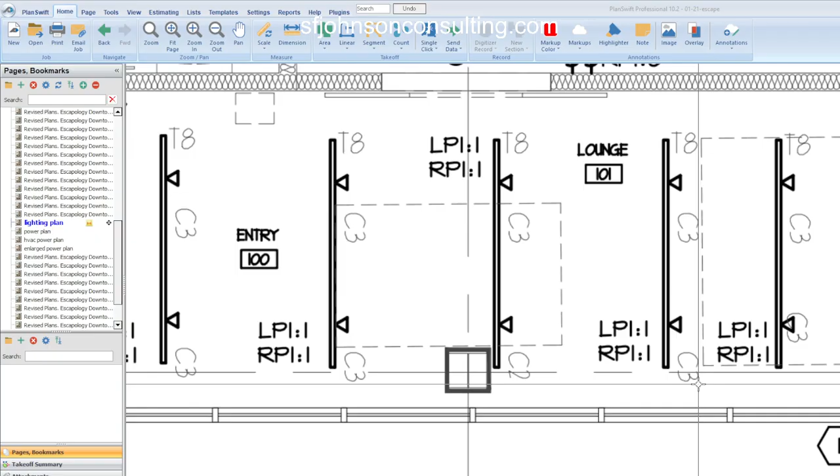But when it comes to electrical, you have a lot of challenges. Okay, the conduit, the wire, how do you determine all these different things? If you're an electrician, you should know what this means, okay? But you may not be an electrician that has time to do this, okay? And so let me show you why you should either hire me to do your estimates, pretty simple, or let me teach you, which is even better, okay?

And so, as you know, with your electrical plan, you have your lighting plan, which we're looking at right now, okay? So we have to be able to determine, we can count, and if you have a good counting tool, as you've seen me count a million times, the counting is easy. The part that's not so easy and that's challenging,

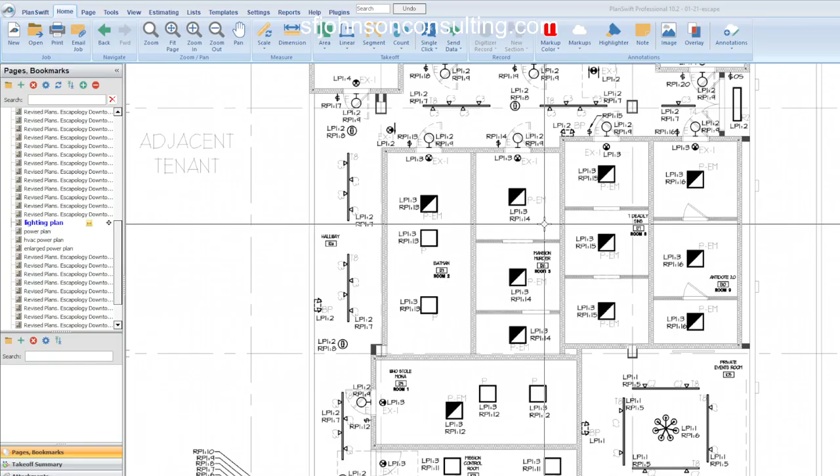We can count all day, and again, you'll see my study video if you choose to see how I did the lights. Okay, this one, the emergency light's different than that one, and how we do it.

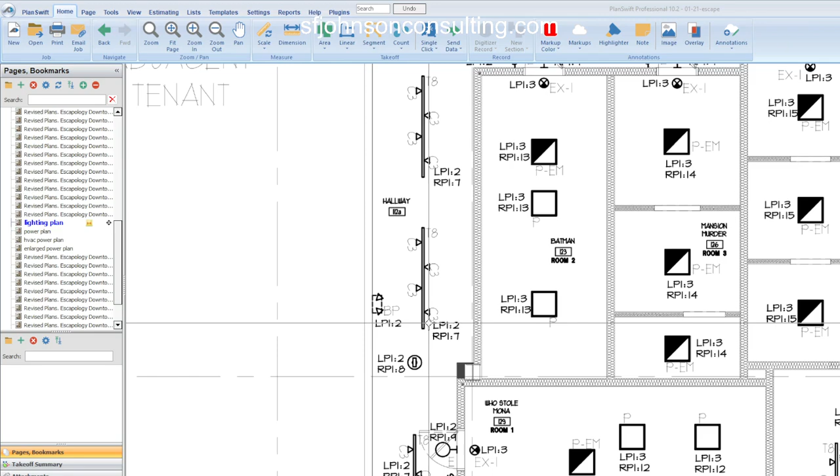If we have the track lighting, what's the proper way to account for the track lighting in terms of your takeoff? Well, it really depends on if it's standard. If you've got 10,000 different lengths of track lighting, then you probably, which I don't think we do. I think all of these are pretty much the same length, T8, T12, T whatever. Yeah, they're probably all 8 foot, or some are maybe a little shorter. No, it looks like they're all T8, which makes it easy because you want to do the takeoff based on how you have to buy the material.

But when it comes to placing the labor, setting the T8 is separated from the labor to set our C2s and C3s into the track. So if you want to make sure, you've got to separate all that stuff. And that's just the lighting plan. This one's a little complicated.

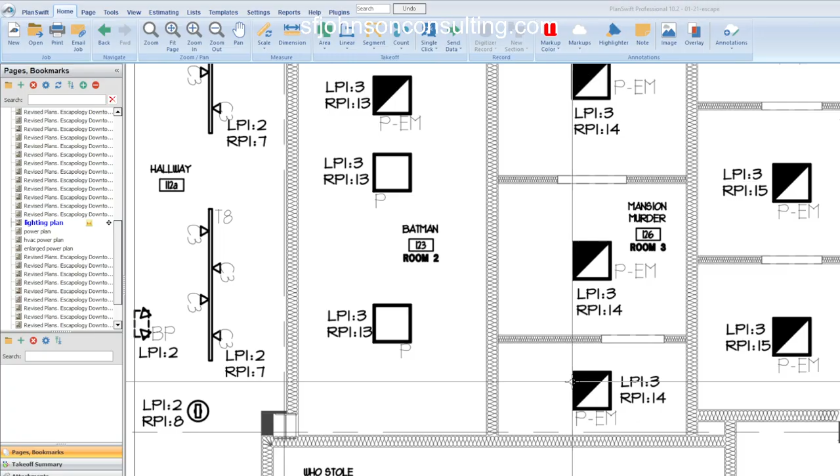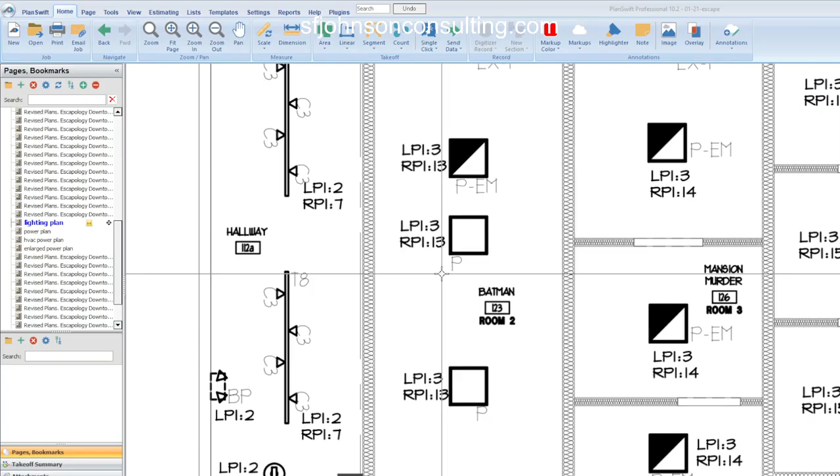Now, in terms of our conduit and wire, we have to understand how lighting circuitry works. Basically they're telling us how the lights are connected based on the subscripts that they have on it. When you take my class, you'll understand how I run the stuff, and it's close enough. Add 10% like most things, and you're close enough. How do you run it, horizontally or vertically? Well, it really depends on a few things.

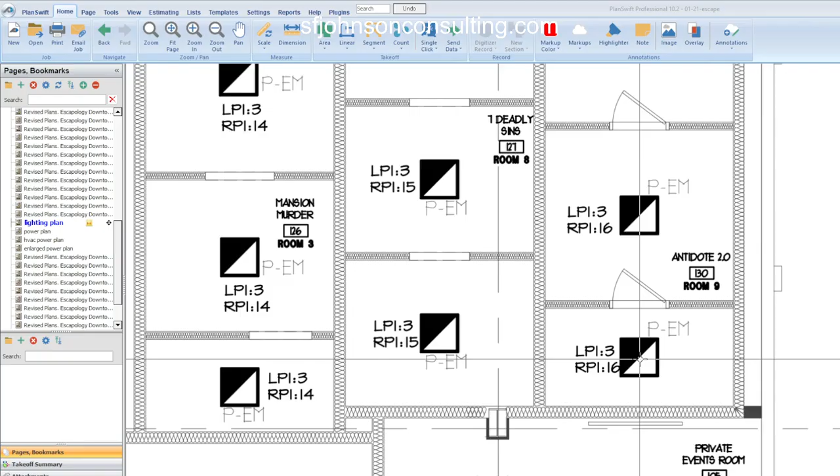How it's noted here, and in terms of lighting, a lot of the same lights, even as you can see in different rooms, are controlled by the same lighting control. And that's the most difficult part when we talk about electrical estimating. What you want to be able to do is give it a sufficient amount that if you were the estimator, and hopefully you have a good relationship with your electrician, you can say, hey, look, this is how I ran it.

And that's why I always give my clients videos. Hey, this is how I ran the conduit, and as far as the wire configuration, it's in the specs, or it's in the plans, or it's standard MC cable for certain parts and number 12s for the home runs. That's typically the case. So that's not hard. But that's what you have to think about, and that's a lot to think about.

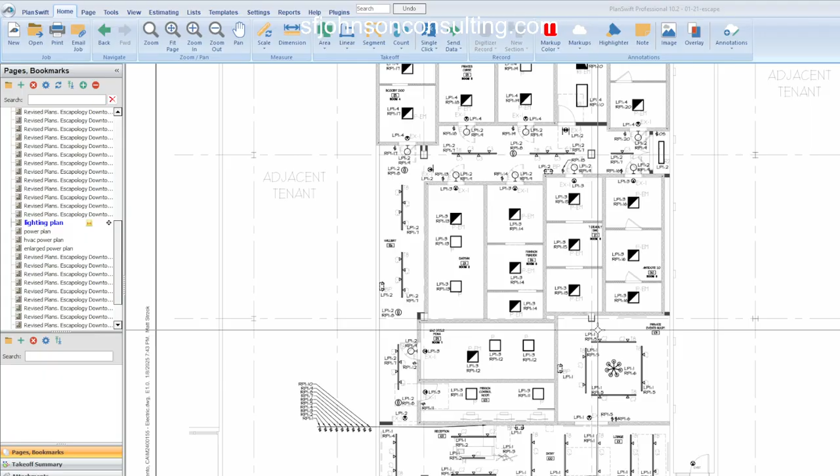Framing: it takes you 5 minutes to do how many linear feet of wall A, B, and C. 2 seconds, once you get real good. But this, no. Because every set of plans is going to be different. The lighting controls are going to be different. What does this mean? Okay, I see. I have to match it up too.

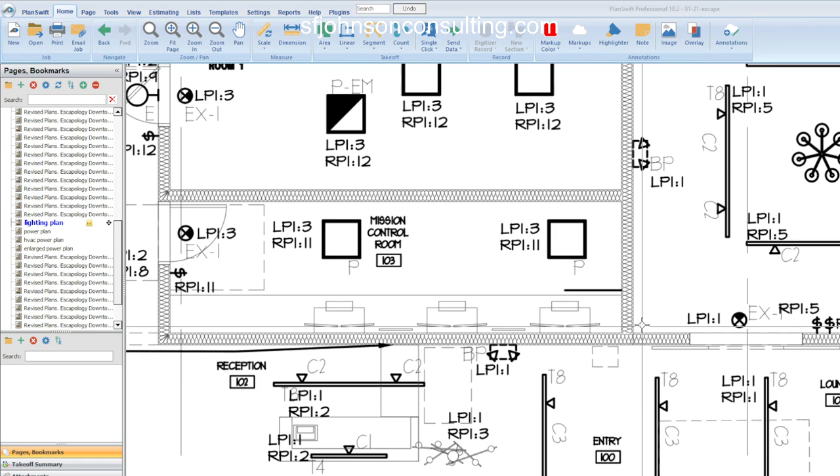But what we have to do is physically run that wire. How would we physically do it? What you want to do is just give the best representation, the cleanest runs. You don't want to go all in circles. You want the cleanest runs you could possibly have that are real life. If you're really good, you're going to say, how far up does this wall go? Do I have to penetrate the wall, if necessary, to get through here?

My son's an electrical tech, and he says sometimes we've got to put a hole in the drywall to see, because we think it's free and there's like a cross. So I said, bridging. He's like, yeah, something going horizontal, not just the vertical studs. And then you end up running into something you've got to cut through to get through the wall. That's why I like working with people that do it, because you get a practical understanding of what happens every day. And then you, as the very detailed estimator, can speak with your professional and say, hey, look, this is how I did it.

Now with video, you can show them, so you can really be competitive. There are people out there using the right tools, doing the stuff as clean as they can, and then going in there and winning. Because understand, when you win a project, it's not set in stone. You need to make sure you understand. If you take my construction law class, contracts and understanding them is very important.

There's so much that if you don't have some kind of mentorship, or you don't do it for a couple of good years for somebody that does it well, and then go out on your own, you're really going to be taken advantage of on so many levels, or you're going to be so lost on how to do certain things.

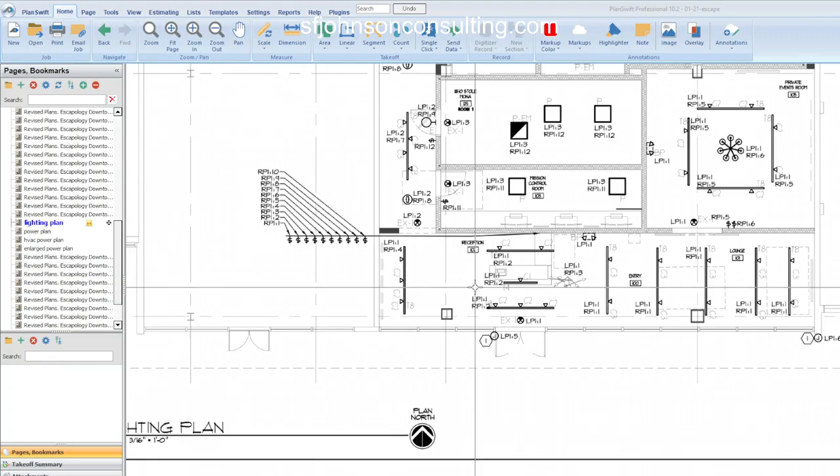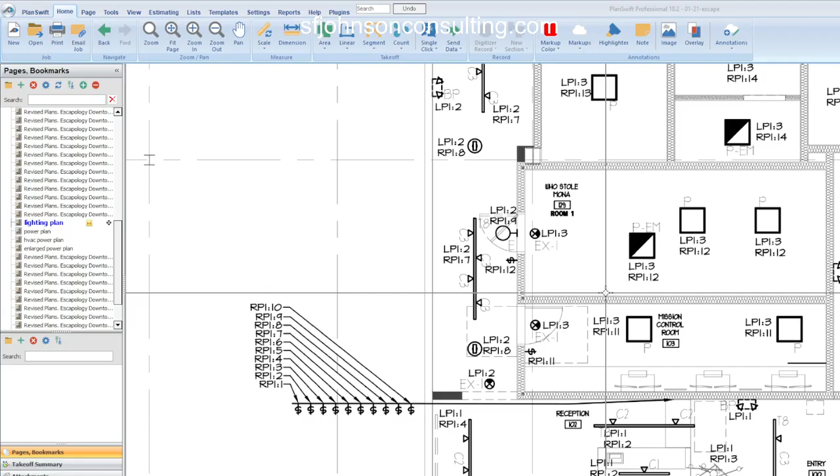Okay, and so I don't mind sharing my logic and my understanding of everything. And a lot of people out there in construction are too competitive to think too far ahead. That's why I don't have the subscribers that I should. If I was some other person, I'd have 10 million subscribers. But for some reason in this country, we think if I help you, I'm not helping myself. And that's the most ignorant concept we've been able to hold on to.

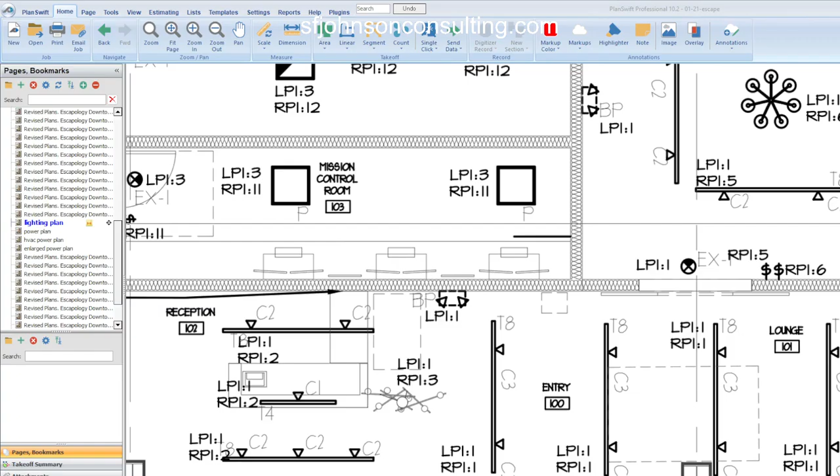We'll keep moving. Anyway, so what you want to do is make sure you do a lot of projects, and the hardest part of it is being able to run the conduit. And how do you physically get that going? It's easy after a time, once you talk to a good professional, a good estimator or a good electrician you work with, you'll get it. All right. So that's just the lighting plan.

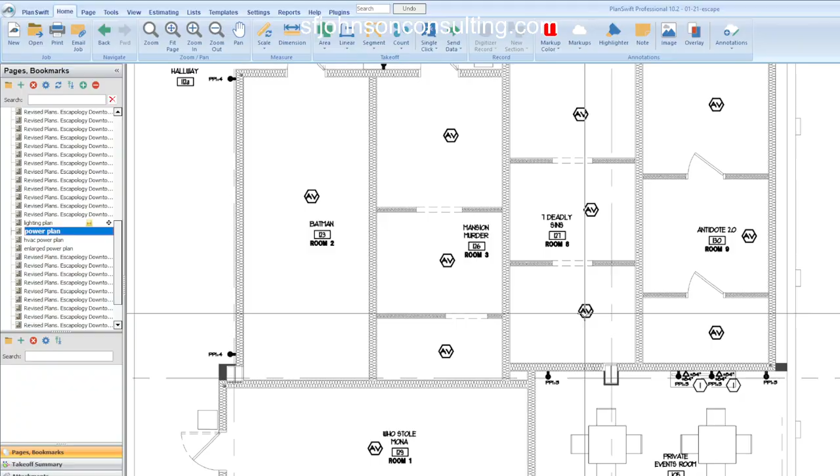Now, the power plan. Depending on how detailed it is, you've got to do a lot of thinking on your own. Okay, and so you have to read the specifications. I'm sure there's some kind of conduit that I have to attach. I'm sure there's some kind of junction box, AV, right, that the electrician's got. But that's why you read the specifications. Or there may be notes. Yeah, there we go.

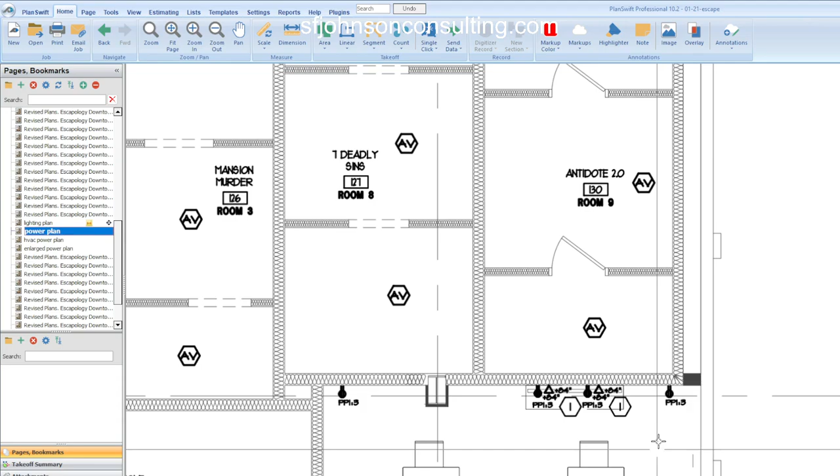4-inch conduit run for low voltage wiring. Audio must be... Okay. Where's number 2? We know what they're talking about. 4-inch conduit. Well, I'll find it, and when I do the video, it'll be clear. But again, conduit and wire runs, that's where it's like, okay, well, what do I do? Because that's a major part of your material cost.

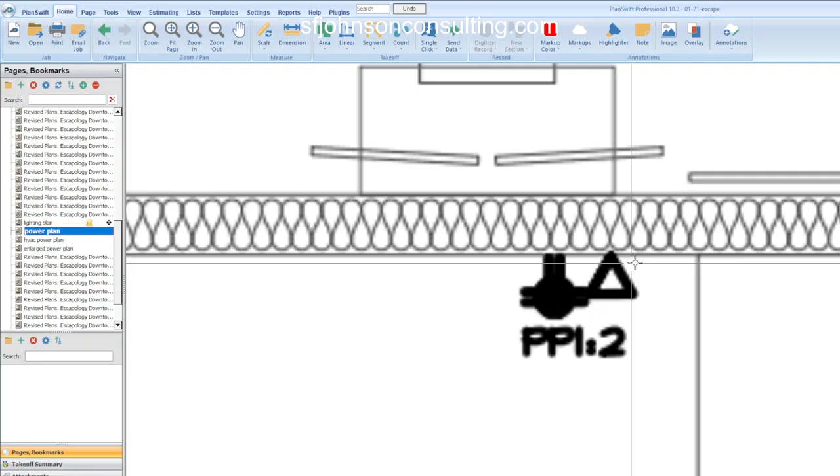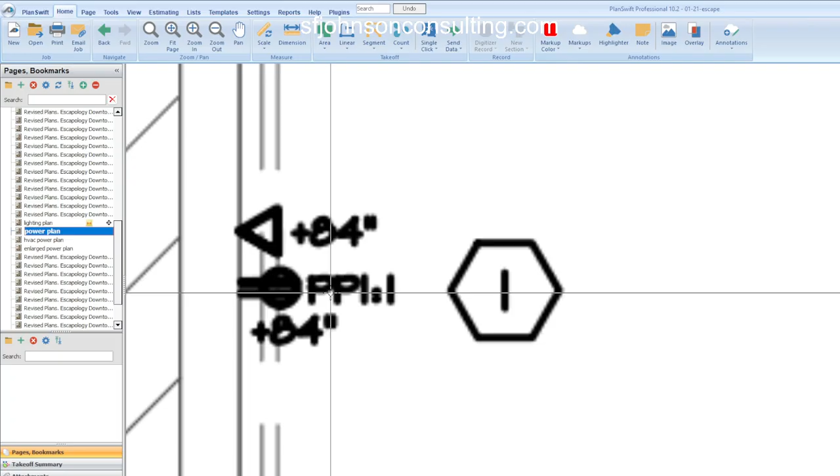Because if I'm the high voltage electrician, I'm not providing Cat 5, Cat 6, low voltage wire, anything like that, right? But I have to provide the junction box and the conduit to the ceiling in most cases. But as far as running the power for the general outlets, general purpose outlets, well, what is PP1? Well, that tells me it's going, hopefully, to a panel called PP1, position number 1, right?

And so just like the lighting, we know that depending on the subscripts and everything that's on there, those can be connected together, and then at some point, PP1, PP2, whatever, we'll show you in class how we run it to the panel. Okay, and what's the best way to run it? What's the cleanest way to run it? Because that's the way pretty much a good electrician is going to run it.

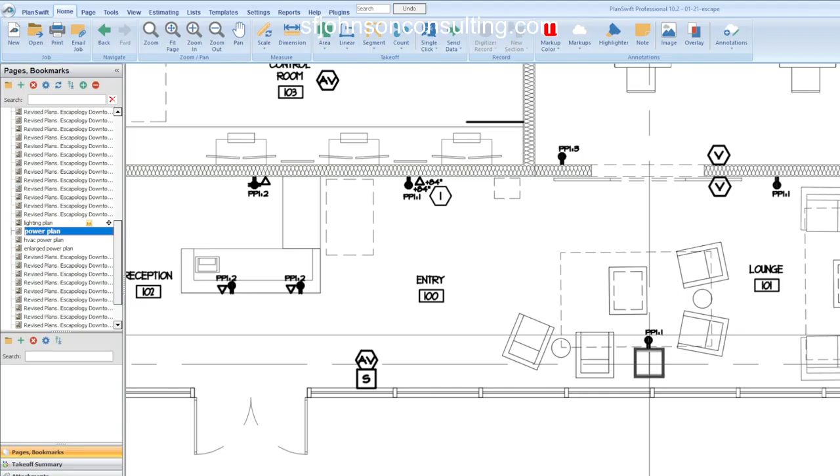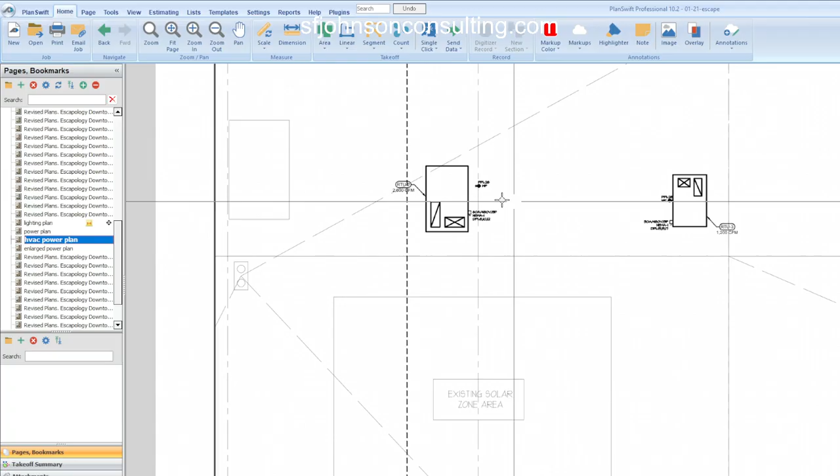And then you have your second step, which is what? Pricing it and determining man hours. Well, you need another tool for that. Just like you have the tool to count and measure lines and stuff, you need another tool for that. And let's never forget the HVAC power, okay, and the disconnects, if they're fused or non-fused, and the general purpose power that also connects to it. You've got to remember that.

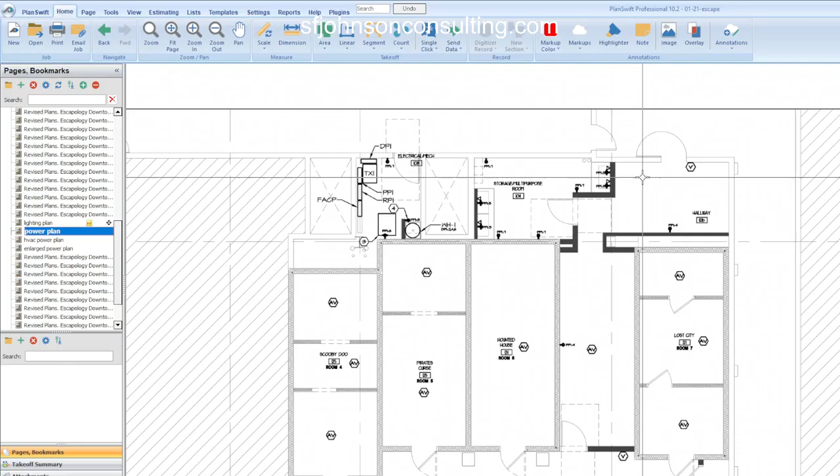Now, I'm out here on top of the roof. Where are the panels? You've got to make that a practice. You've got to know how to go back and forth. In most sets of plans, the only place you're going to find the position of your panels is on the power plan. Maybe they show you the panels on the lighting plan. No, they don't, right? Because that's just not what they do.

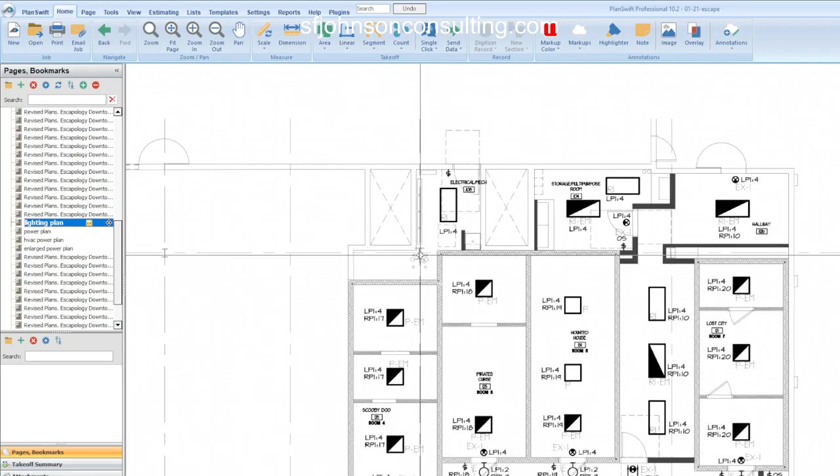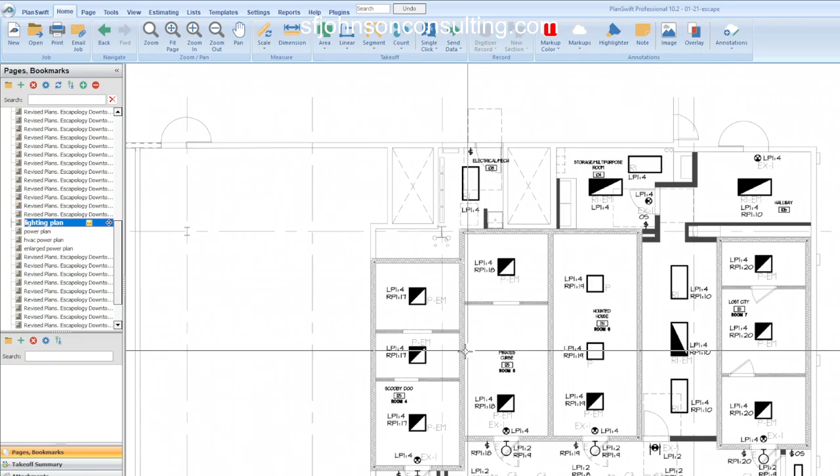But they show you on the power plan, so you have to know when you go back to the lighting plan, they give you a little outline of them. But which one's P1, P2, which one's LP1? You've got to go back to your power plan and note it in your brain. And then when you're running your home runs for your lighting plan, you know LP1 is right here. And so I run them all together, and then I run the home run to wherever I've determined, for all of the LP1s.

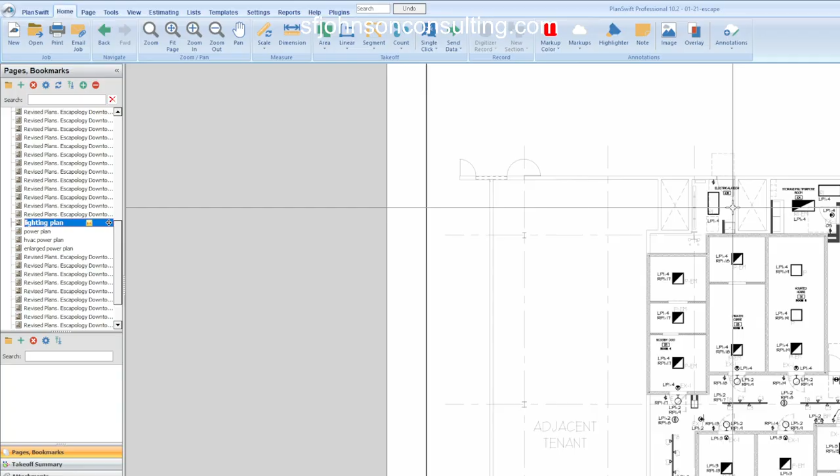RP118s, we ran them all to this location. We ended it here, and now we're going to run the home runs from here to there. That's how that works. And you can imagine at the end of it, you can't see lights or anything, because all you see is all of your runs, whereas this is much easier, not a lot of outlets, which is beautiful.

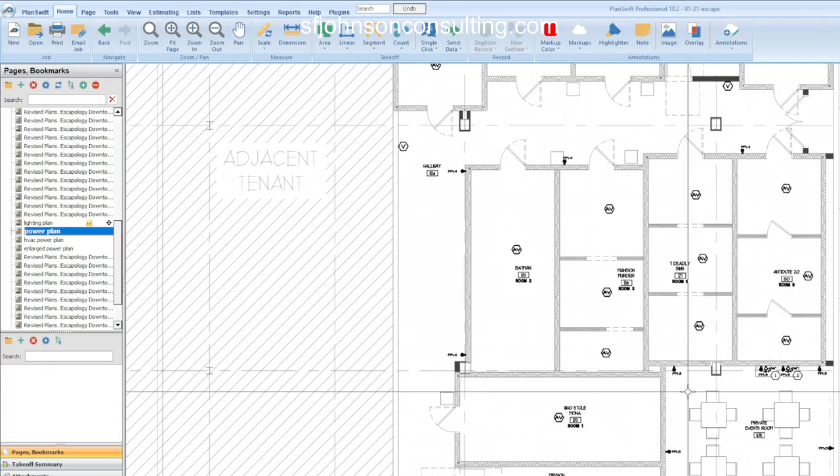And so we connect all of those in what we call series, right, all together. And then at some point when we figure where the end of the P4s are, we run it to the home run. Add 10%, don't worry about the vertical runs up and down the wall, even though it has good enlarged plans to show you exactly.

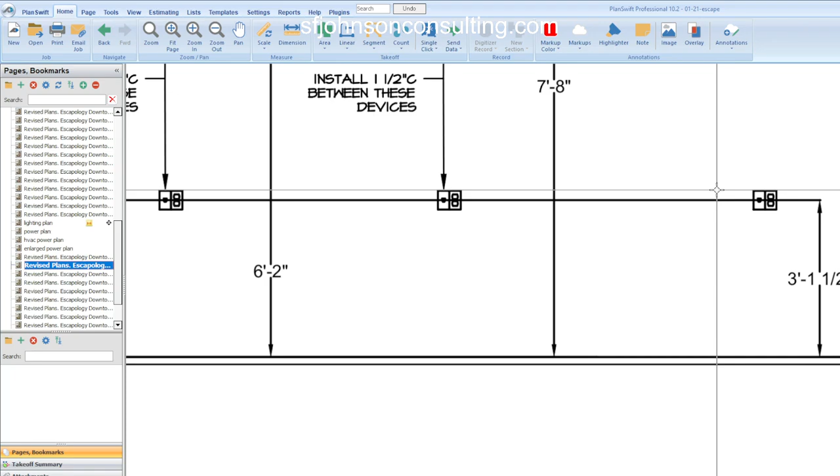So this might be good for me and my son. We're talking about California regulations. Well, it's probably standard that any device is standard 3.5 feet above finished floor, and so what they did is give us enlarged plans, but we don't really need that. This is for the actual electrician when he has to go and do the work. Now I can do my actual measurements and determine exactly where everything has to go.

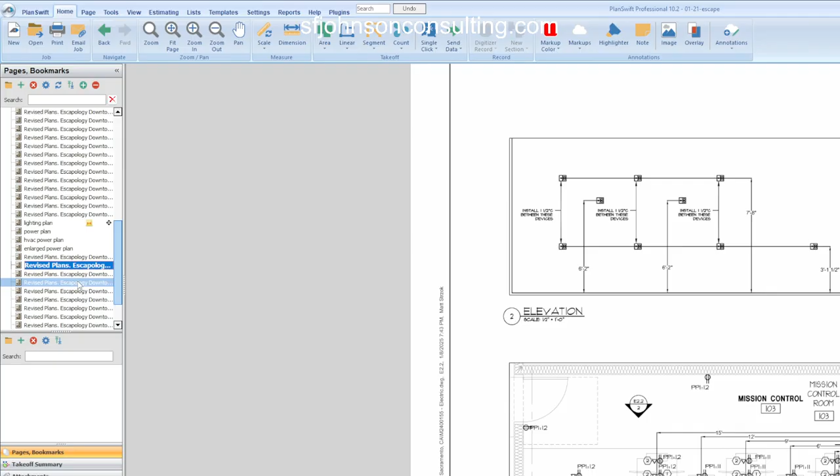And this is what it looks like on the plan. But in the elevation view, right, in the real life view, that's what it looks like. All right, and I didn't mark... okay, so HVAC plan, all the enlarged plans. Where did I? That's plumbing. Okay, well, you just have to go with me on this journey, because the last thing we always have to do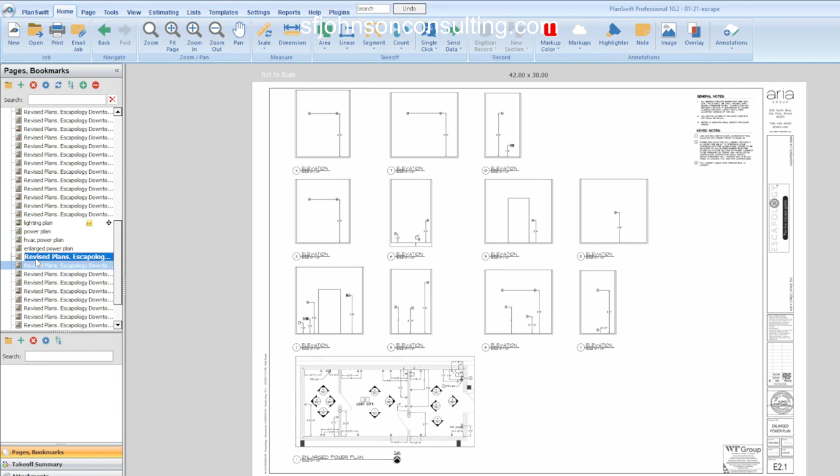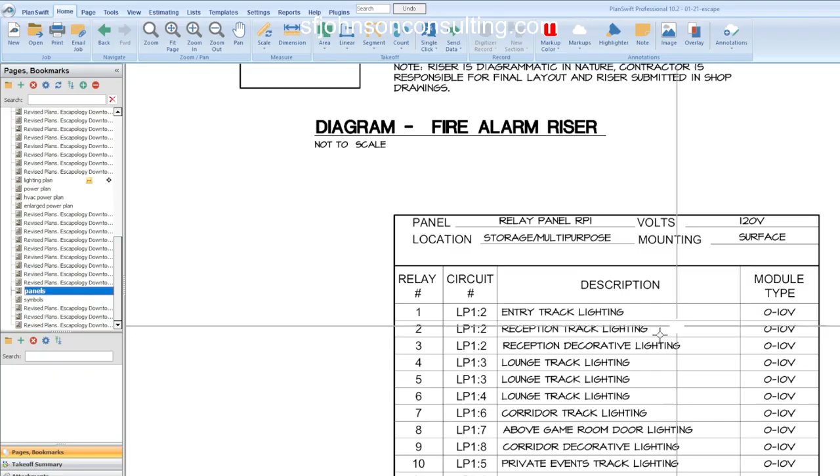is, let me make it easy for my mouse hand. We have to look for and find good elevations for, there we go. Oh, I did put it on there. And we have to find all of, okay. So this tells you your circuitry for the lighting control. That's nice and clean. It's a nice set of plans. All right, so we need our single line, right?

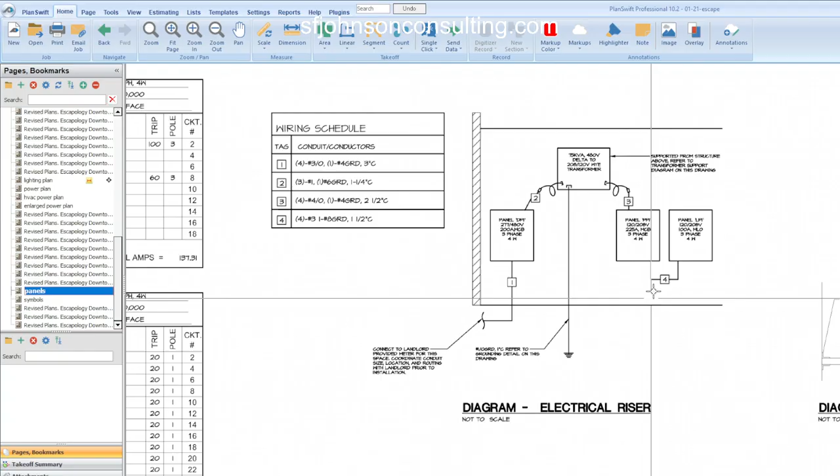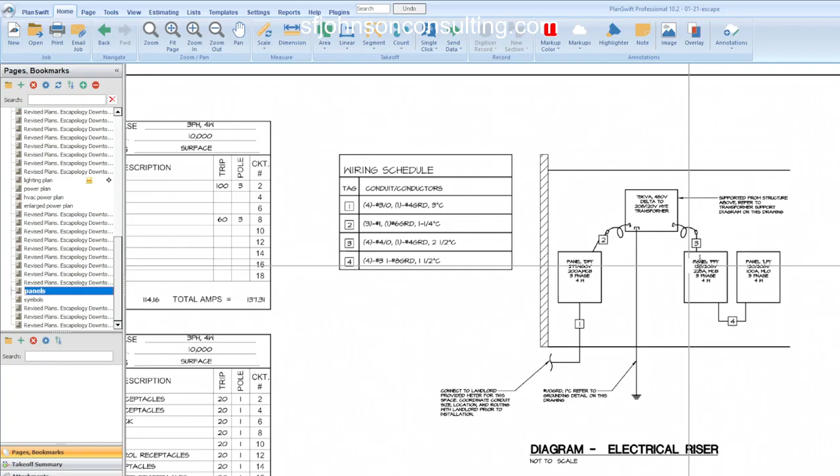So we can determine all of the power feeders. And when we looked on that power plan, these are very close to each other, so it shouldn't be a problem at all. And so the 2, 3, 4, and 1 should be telling us the wire configuration for each of those. And whether I'm asked to or not, I just use rigid steel for all of the power components. EMT to it, or PVC, depending on where it's at.

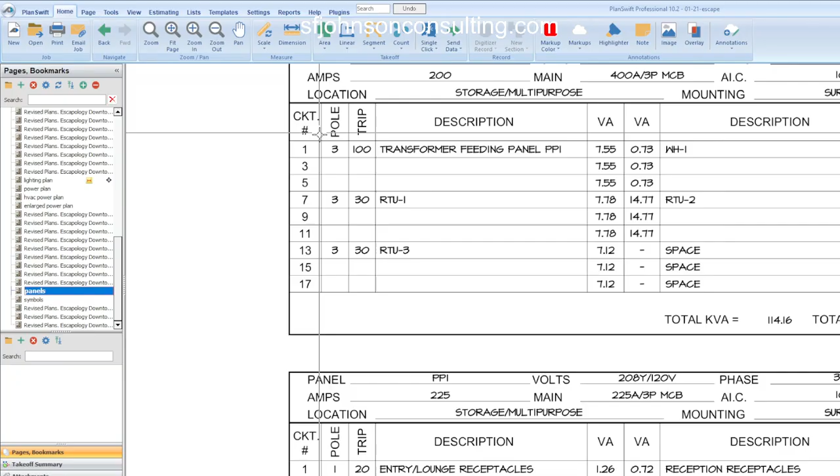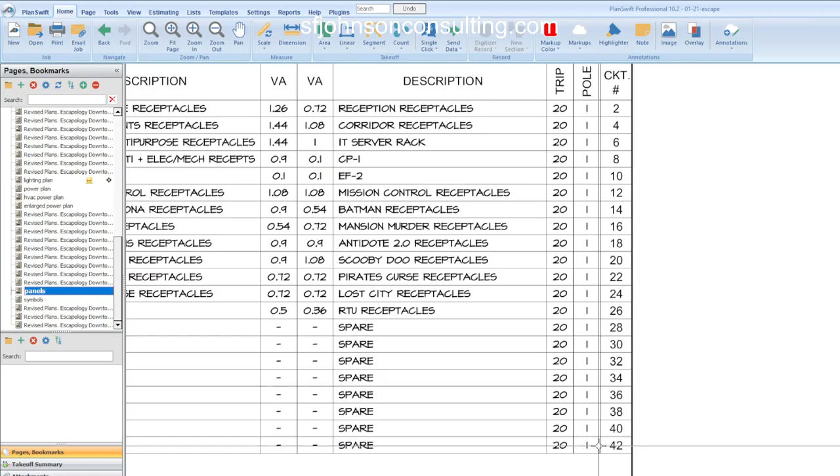But the last step is we got to count our breakers, right? The size and how many poles on both sides. Okay, and we have to be able to determine, based on the number of breakers, our cost book is going to tell us how many man hours we should apply. 42. Now, it doesn't take me that long. Because the better you get at a thing, it shouldn't take you that long, right? But we are saying that this is what the construction industry standard is giving you. And if it takes you less time, what do you do? You knock those man hours off and you become even more competitive.

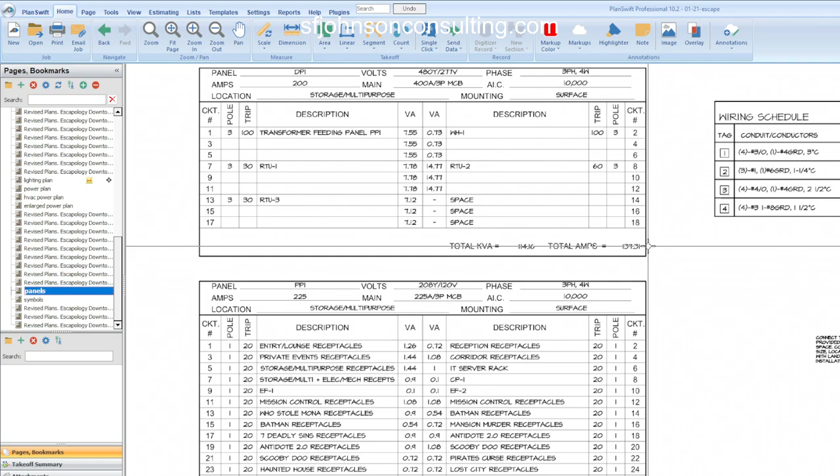Okay, and so typically a 42, that's about 15.1 man hours they give you to install a 42 breaker panel. Anything above or below that, I forget, because that's the typical 42 position. And so, yeah, we got to count all the breakers too. So that's like the last thing. But as you can see, the easiest part is just having a really good counting tool. But now you have to make sure you have a good and logical way of determining how many linear feet of your feeders, your MC cable, your number 12, number 8, whatever it is.

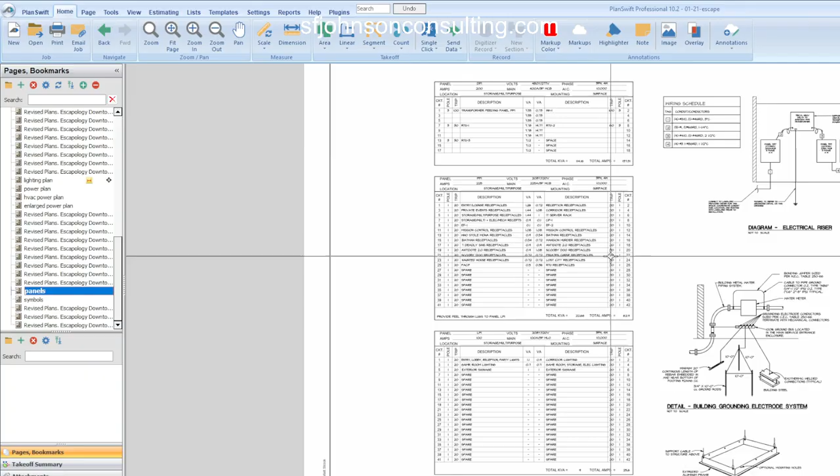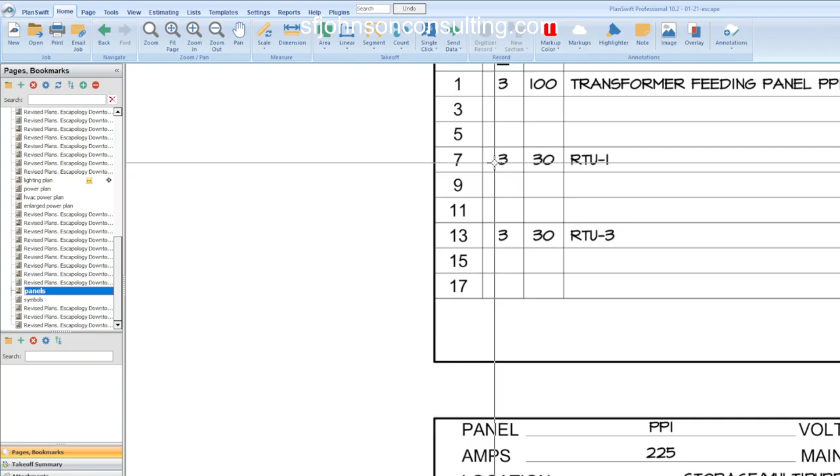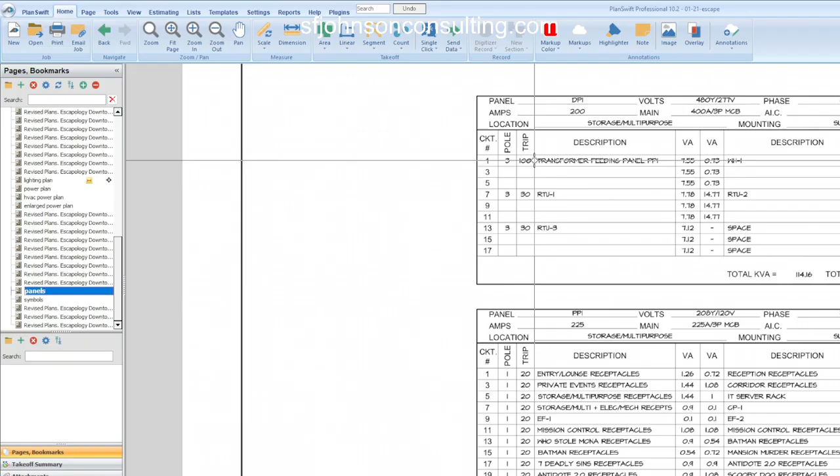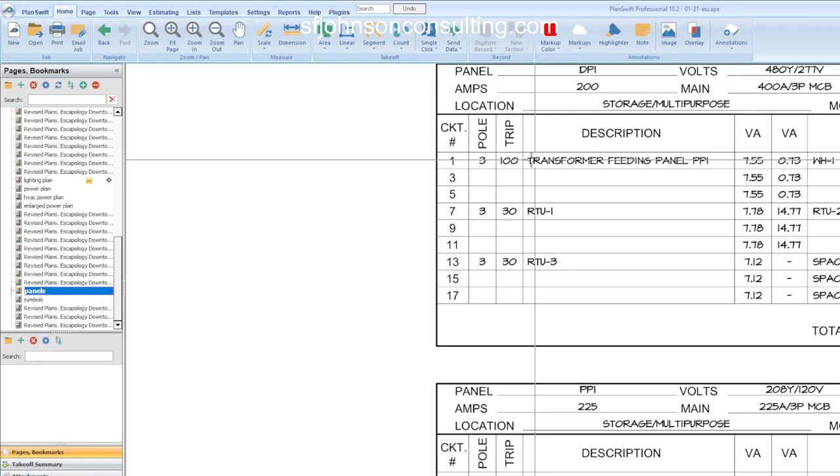And just rule of thumb, if it's a 20 amp one pole, the wire running to it is usually a number 12. But if you've got like rooftop unit 3, 3 pole 30, that's telling me that that's not just number 12s. And so you want to go a little deeper than what you're given in the plans. Let your electrician know, or go from past experience, because the electrical estimator isn't an electrician. Electricians can determine, depending on the power consumption of the piece of equipment and a whole bunch of other factors, what the wire configuration is. So if it's not outright given to you, then you should be able to get it.

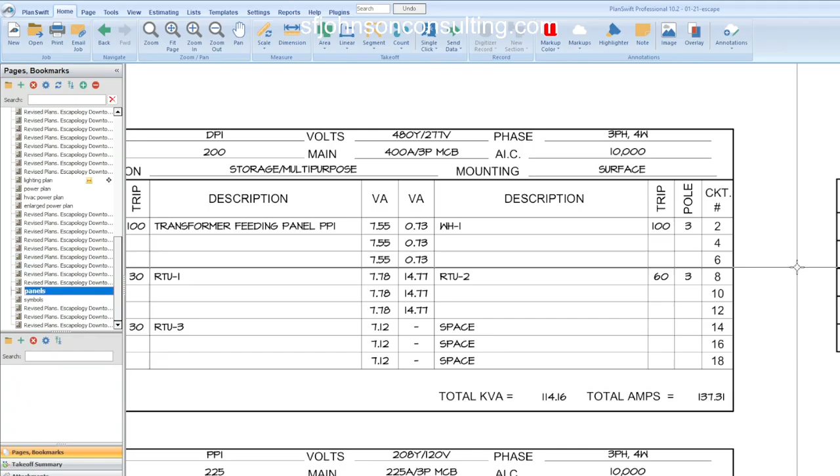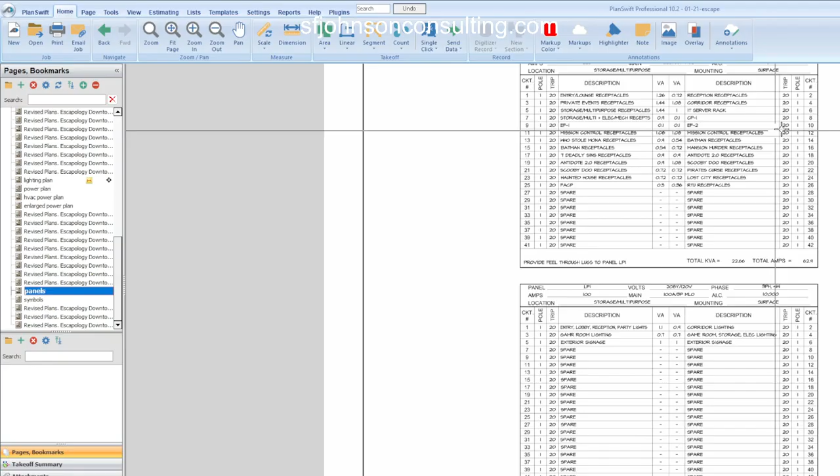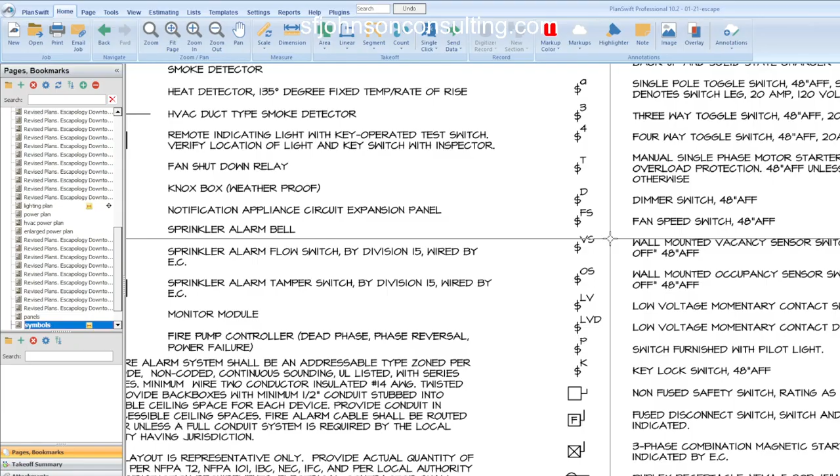All right, and I think that's it. Know your symbols, okay, and usually in the estimate. So, 3-step process. 1, counting is easy, okay? What's not so easy are the wire and conduit runs and how to think about your labor costs. Okay, that's not so easy. So you need to do it for the lighting plan, for the power plan, break out any HVAC power.

And 2, if you have a restaurant, which I'm doing a Dutch Bros, which is a crazy restaurant, your outlets are going to be all over the place, okay? NEMA 5-20P, NEMA 5-15, NEMA. So first thing you want to do when you have restaurants of any kind is go in the power plan and start to break that down, because it's always some crazy configuration on how you have to count your outlets. Always, any restaurant.

Dutch Bros is not even a restaurant. I mean, it sells stuff you put in your body, but imagine a Marie Callender's. Oh, they don't have them anymore. Oh, Texas Roadhouse. I love Texas Roadhouse. I got to go at least once. And this show should be sponsored by Texas Roadhouse, where you can pick your steak. Oh my God. And it's just always so good. I don't know about those people.

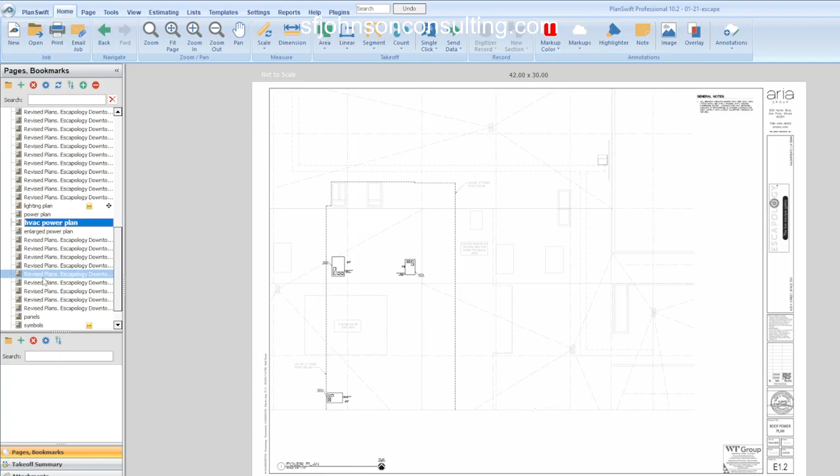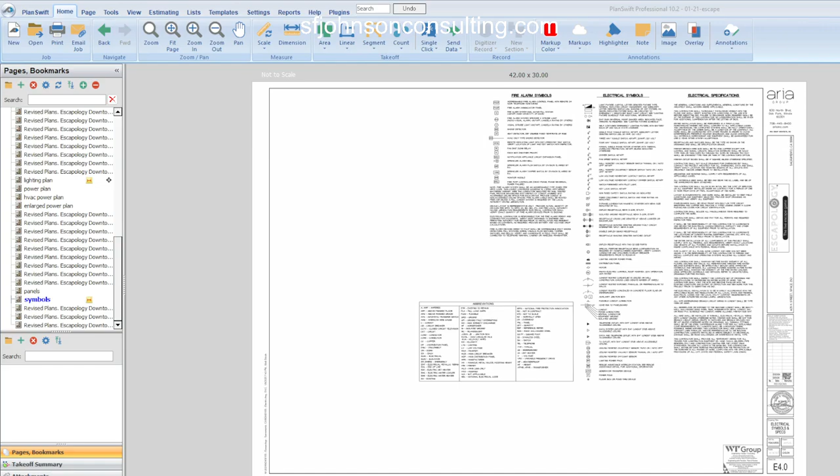All right. So anyway, the pièce de résistance, okay, that's French right there, is, let's get it over here, the specialized Excel spreadsheet that will have some stuff filled in for you. And if you take any of my estimating classes now, I went from 10 weeks to a year to forever, as long as I'm alive and you still need to learn, because my clients are self-performers and they'd miss more classes than they attend if we were strict about it. So I make them videos, got requirements. Hey, our numbers have to match. If our numbers aren't matching, we have problems. And so when you take a class with me over however long it takes you to feel comfortable to branch out on your own, you receive this stuff from me.

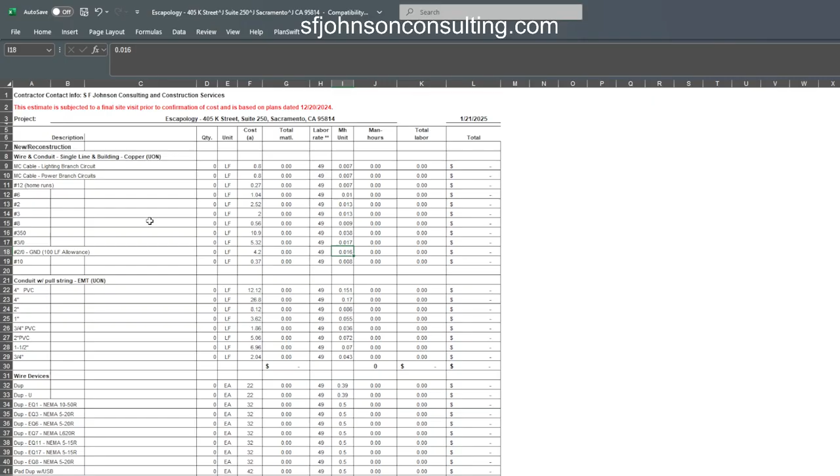I'll teach you how to do this, and I'll give you man-hour calculators that are just the wire, that are just the conduit of all kinds. And the wiring devices are kind of crazy. So we're in the process of doing so many for electrical, because as you know, if you're an electrician, all of your wiring devices are insane. There's so many kinds. So we want to break that into like a book of stuff for wiring devices. And then lighting and panels and switches, not as bad. But when I teach you, you get this. And I show you how to edit it. And I give it to you again if you mess it up.

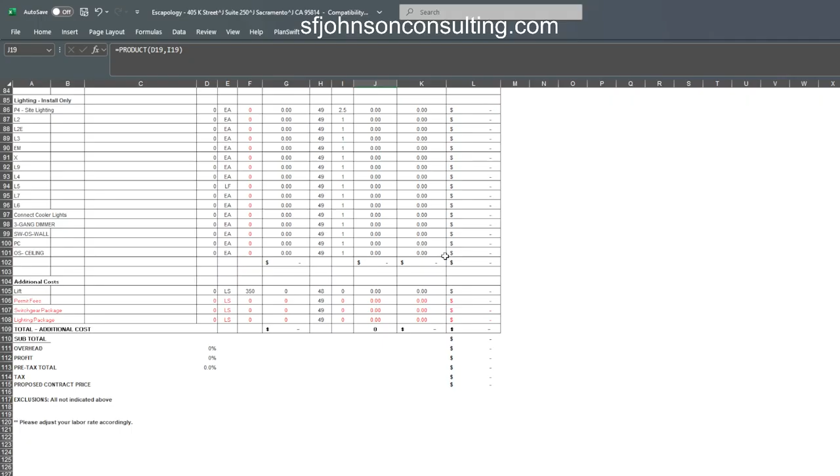And we go over what overhead and profit should actually be. Today's overhead and profit is based on last year's direct operating costs. Okay, so it's almost tax season. I've started myself. You should be determining or know really well right now what last year's operating costs are, because those are adjusted every year. I've been in business 16 years, and some of the years, the amount of money I made blew my mind. And some of the years, I'm like, how did I even survive? So those things change over years, and you have to change with it.

And one thing I've also noticed is that contractors are horrible with keeping track of any kind of cost. And so if that is you, make sure you reach out, because I am too, but we got to fix our problems in 2025. It's important. You don't want to make so much money that you don't care if you're losing it, and you don't even know it because you don't pay attention. I think that's a very bad universal principle to have, to not pay attention to how much money you're making. Don't pay so much attention to it that you're an a-hole, but you need to be aware of how much money you're making every week, every month, and how much you're paying out and to who. Because some of your assistants are ripping you off and then blaming somebody else. So please pay attention.